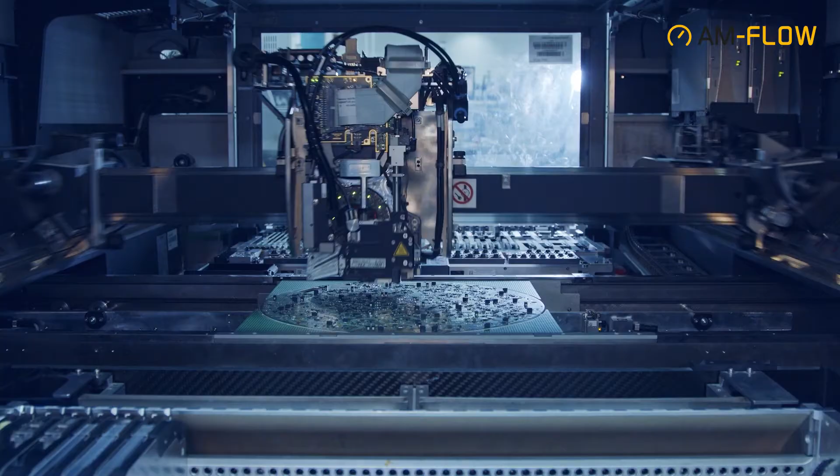AM-Flow is located in the vibrant city centre of Amsterdam and in Eindhoven at the Brainport Industries Campus, known for its unique high-tech ecosystem and a hotspot for Dutch chip technology and robotics. AM-Flow works on automation solutions, Industry 4.0 solutions, for the 3D printing industry, like computer vision solutions and robotization, enabling simple tasks within 3D printing factories. More about this later on.

Let me start with a video of one of our clients and a leading service provider, Materialise. CTO Bart Van der Schueren outlines the need for post-process automation in additive manufacturing to enable companies and AM production facilities in general to scale their business.

As companies scale their AM operations, they increasingly rely on automation. But the potential to scale is limited by the post-processing, which today is still mostly a manual process. Scaling this manual process by simply adding people increases costs, variability, and doesn't increase reliability. If you want to scale production, the only way forward is to automate post-processing. This is especially the case in mass customization, but that's easier said than done.

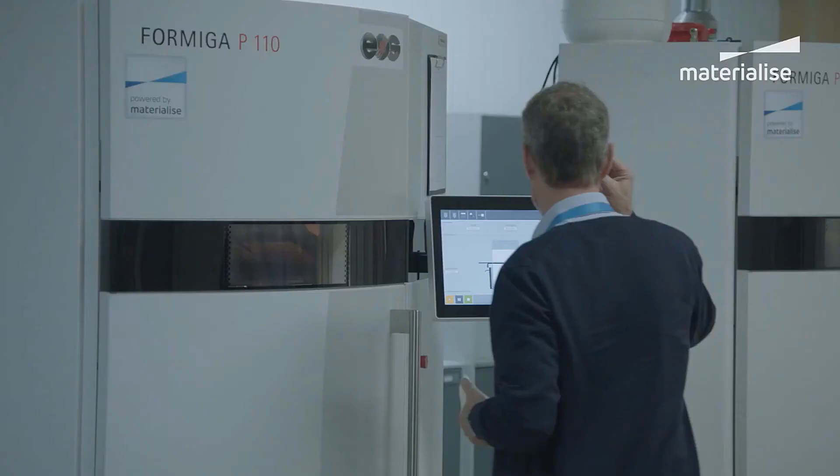If, for example, you're working in eyewear, different customers may want different colors for their personalized eyewear, which complicates the process even more. Also, even if you talk about mass customization, the total output is still relatively small.

We believe that the time for automating post-processing is now, and at Materialise, we've been heavily investing in these processes. An example of our recent commitment to automation is that we robotized our entire cleaning line in our medical production to ensure the highest possible quality standards.

Fortunately, Industry 4.0, with increased automation capabilities in robotics, is creating new ways to automate the post-processing steps. This will require time, effort and new investments, which will only pay off if AM mass manufacturing starts to scale. Which it will. And that's why investing in automated post-processing is vital.

What Bart Van der Schueren highlights is one of the next shifts necessary for additive manufacturing to deliver on some of its most principal promises: a smaller ecological footprint, local production, full freedom of design, and competitive cost price.

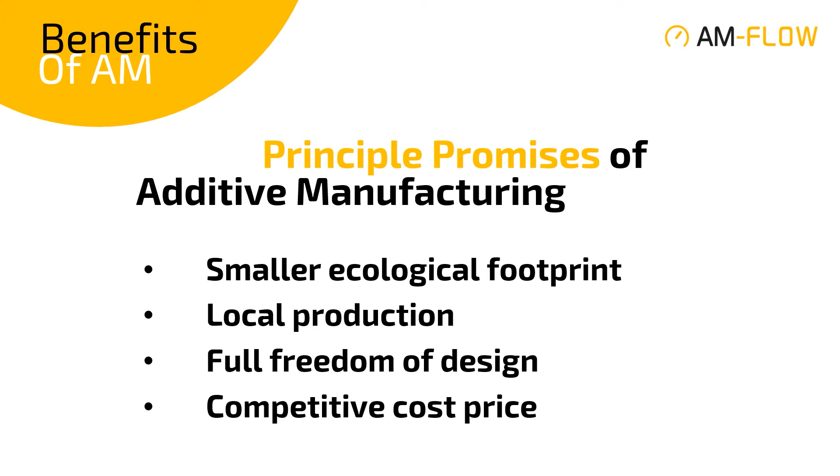So let's put AM-Flow in perspective. As more applications are being found for additive manufacturing, print volumes are growing rapidly, and demand from end users is also starting to increase for more granular improvements in efficiency, productivity, material availability, quality increase and measuring and monitoring, and above all, cost and speed.

And we need to appreciate that the benchmark market is that of traditional manufacturing technologies, which have matured out. They are completely certified and brought to the highest cost efficiencies possible. And we believe this is also the route for the additive manufacturing industry, and we have no time to waste.

Additive manufacturing needs to focus on improving on the fundamental KPIs that not only underlie a broader adoption, but will make additive manufacturing more competitive, reduce costs, increase speed, and improve quality.

Now, it's true that the additive manufacturing industry has grown substantially, and well, the past pandemic year and a half put aside, it looks like it will continue to grow, with ever more applications and increasing numbers being printed.

Industrialization is an often used word in the current context, and to date we still have not been able to give this term true substance in our industry.

To date, our industry has evolved on the basis of workstation optimization. Let me explain: improving the output of printers, creating new materials, adding post-processing treatments for further increase of the quality of the output to meet end-user demands and expectations.

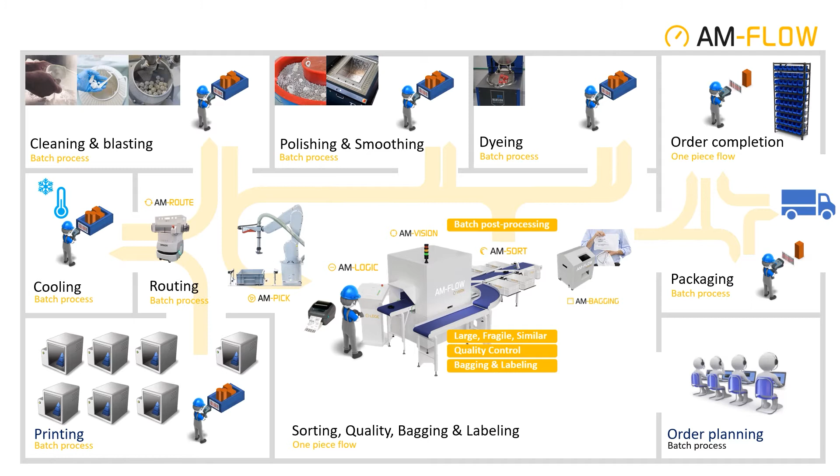AM-Flow is a supplier of this automation. We provide the connecting dots between the individual workstations, creating cost efficiency and lead time reduction. And we aim to create an optimized and automated additive manufacturing production workflow.

We are AM-Flow. So let me ask you, how do you manage to keep track of more than hundreds of parts with endless possible geometries as a consequence of freedom of design? And through all post-production steps required for each individual part without a clear identifier of each part? The answer? Have a look at this video.

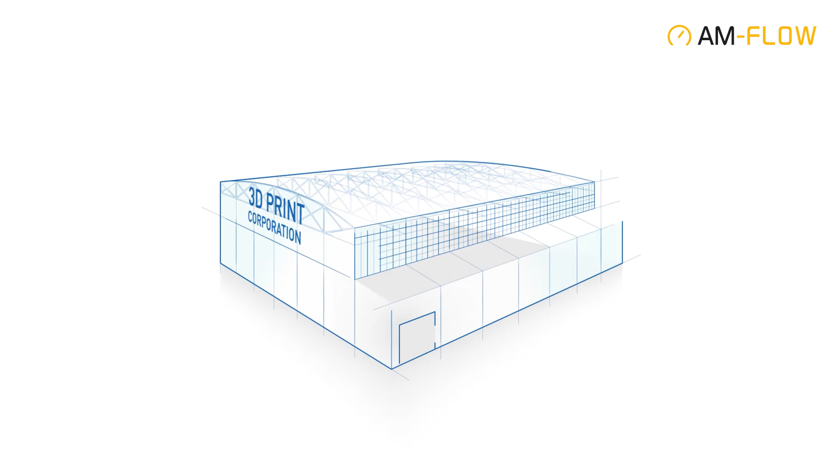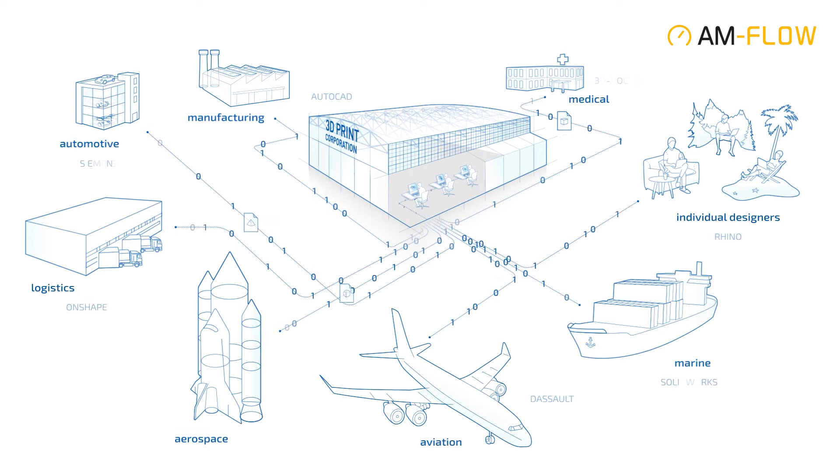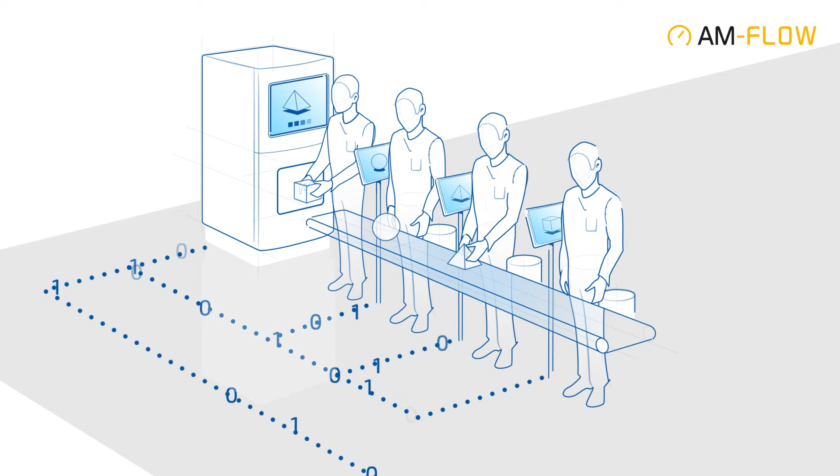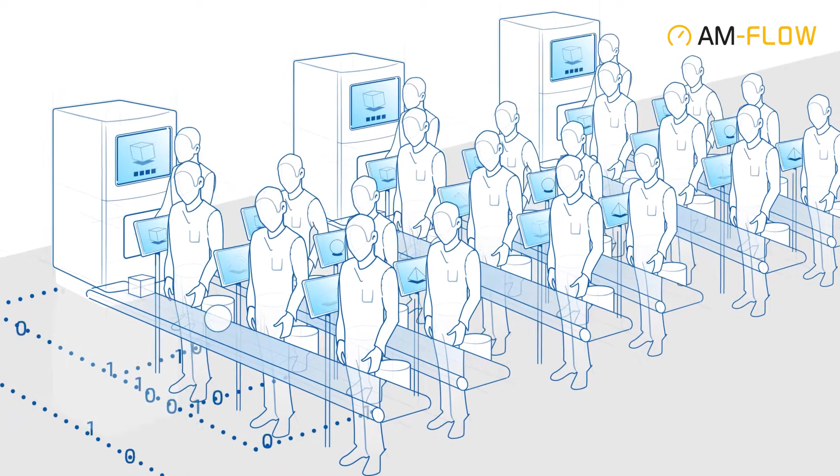Familiar to you? As a successful 3D printing company, you are facing rapid growth in volume as well as differentiation. Handling high mix and high volume goes smoothly in the first stages. The designs of your customers flow as vast amounts of bits and bytes through your pre-production department into your industrial printers. But after 3D printing, the digital flow comes to an abrupt end and switches back to the analog age. Especially all the manual sorting doesn't scale at all. Labor costs increase exponentially, space becomes a big problem, working conditions get poor, and people start making mistakes. The AM Vision is your automated sorter solving these problems.

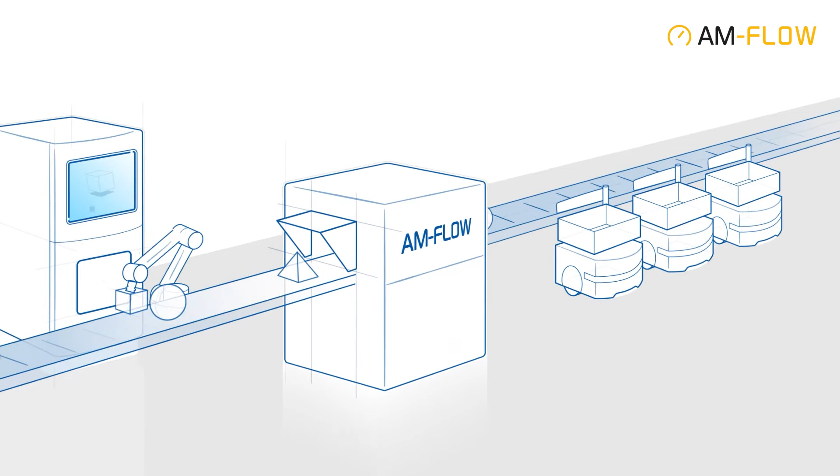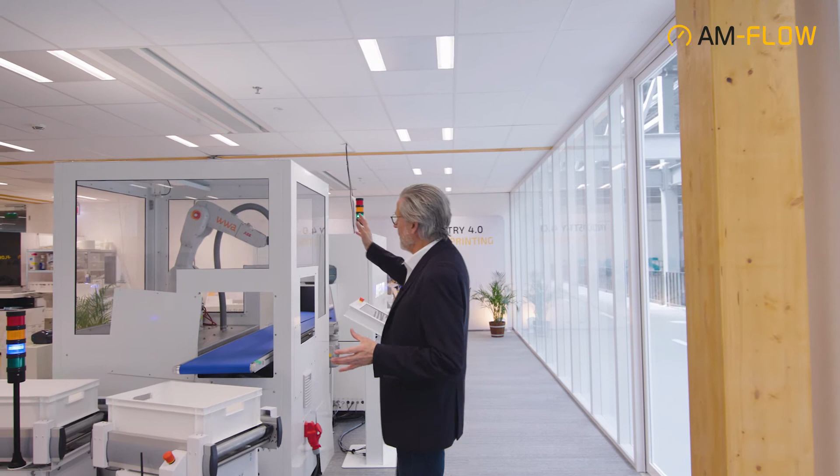First of all, we have here the AM Pick, which is picking up individual parts out of a bin and placing them on the conveyor belt. This is our AM Logic operating console, on which you can identify the parts, and the data is collected and brought back to the ERP. This here is where the magic takes place, the AM Vision, where parts are identified on geometry only. Finally, once these parts have been identified, you can sort them into different bins and route each individual part to the appropriate post-processing step. Now let me talk you through each of these individual solutions one by one.

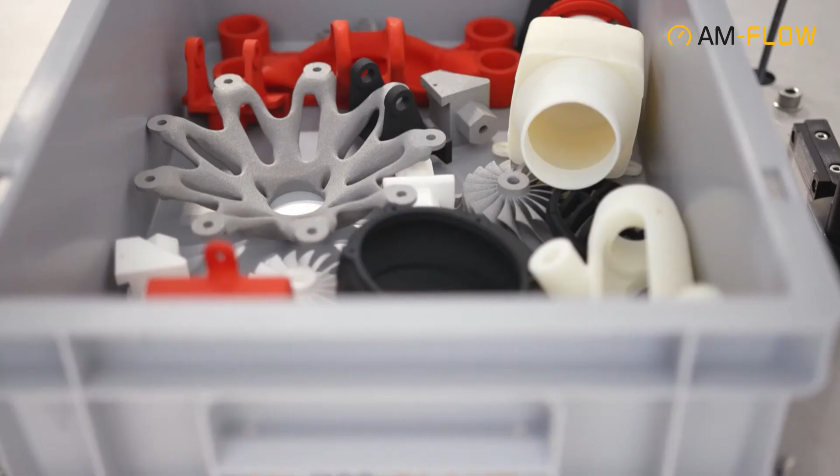So the first challenge we face is automated picking of 3D printed parts. Our AM Pick is a robotic solution able to pick parts of different size and shape out of a bin and place them in a machine or on a conveyor belt, going from a batch process to one-piece flow.

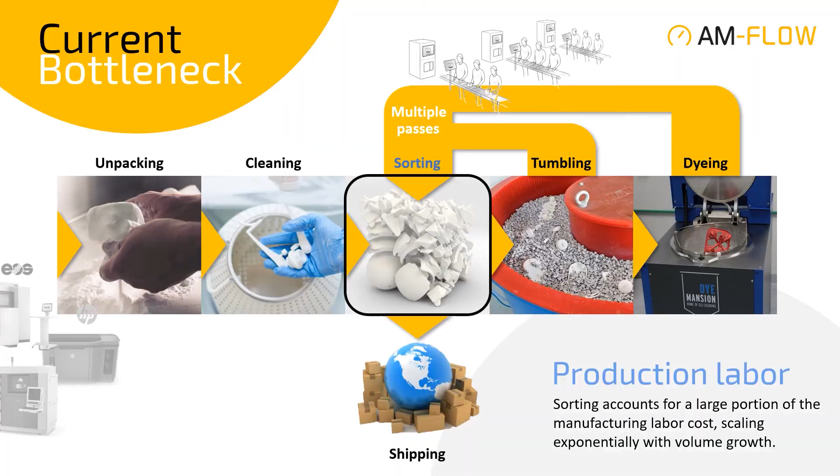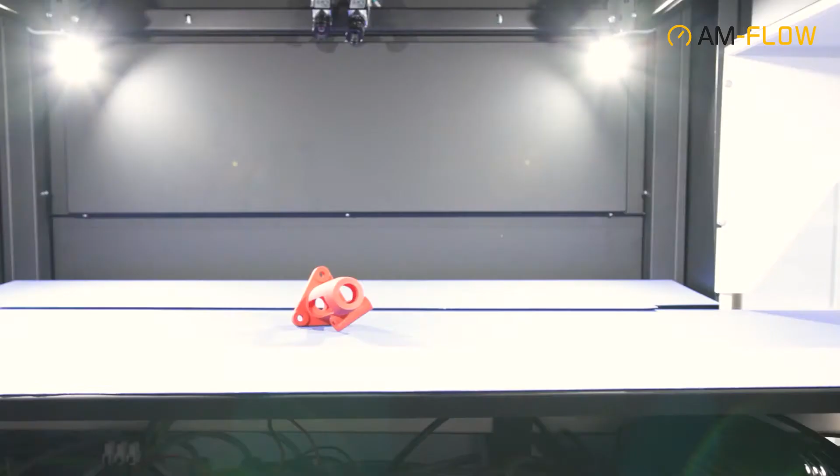The kernel of AM-Flow is the AM Vision. With high mix and high volume output, working ideally to one-piece flow, identifying unique parts manually has become a time-consuming and labour-intensive task. So once cleaned, bins with 3D printed parts of all different shapes, each with individual post-processing steps like polishing and dyeing, must be sorted and go to different departments or be collected for different customers. You can now automate this with the AM Vision. The AM Vision identifies parts based on their geometry only. This geometry is a unique fingerprint, and we can recognize parts in under a second, in 0.2 seconds. With this identification information, we're able to route these parts to the next step of the process for this printed part.

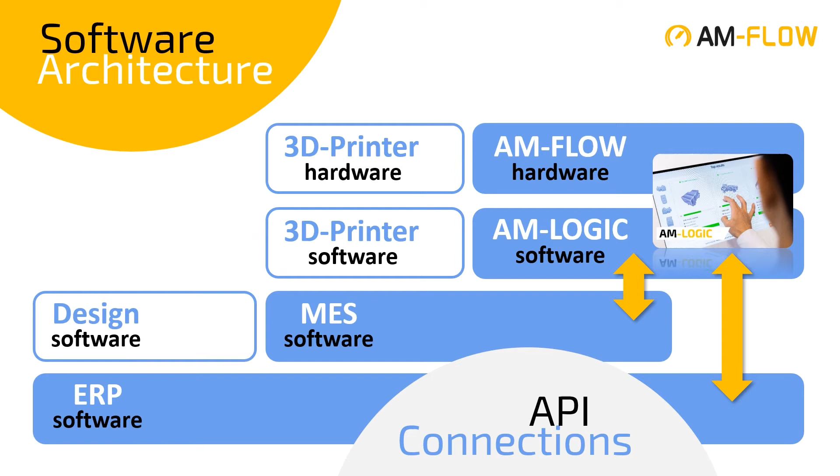The AM Logic is our software solution. It provides a seamless integrated software connection between our modules and the existing IT architecture of the customer. The AM Logic software suite contains APIs for both traditional and 3D printing, CAD/CAM, ERP, MES and PLM systems. Static or mobile operator consoles are provided so that everywhere in your factory you have the digital backbone at your fingertips. Connecting the dots in end-to-end digital manufacturing—that's what this is about.

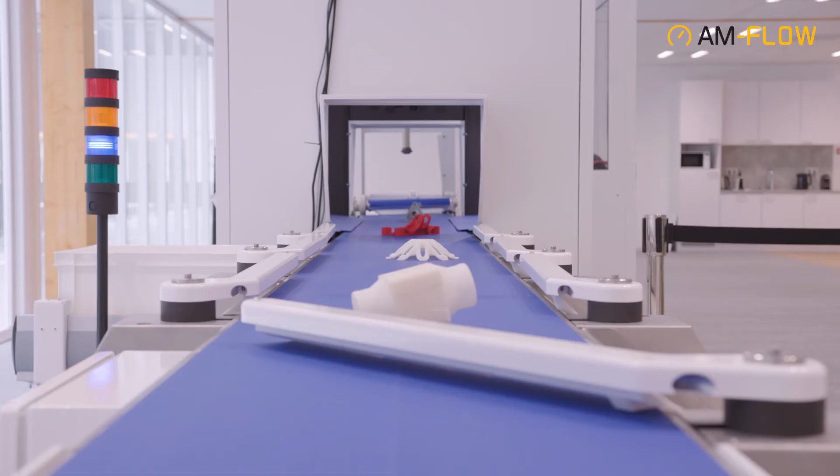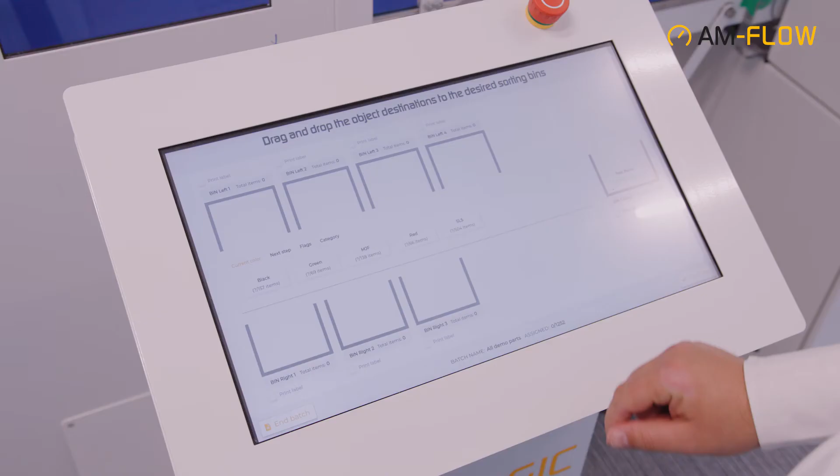In combination with the AM Vision, AM Sort forms a complete 3D printing sorting station. The design is modular, easily expandable and pre-wired. Items are shifted to either side of the sorter conveyor, and depending on the amount of finishing steps you have in your factory, you define the amount of sorting docks you require. Selection of the bin is easy via the console. Each end of the AM Sort can be adjusted to attach other modules, like automated guided vehicles or bin selectors, or our bagging and labeling solution.

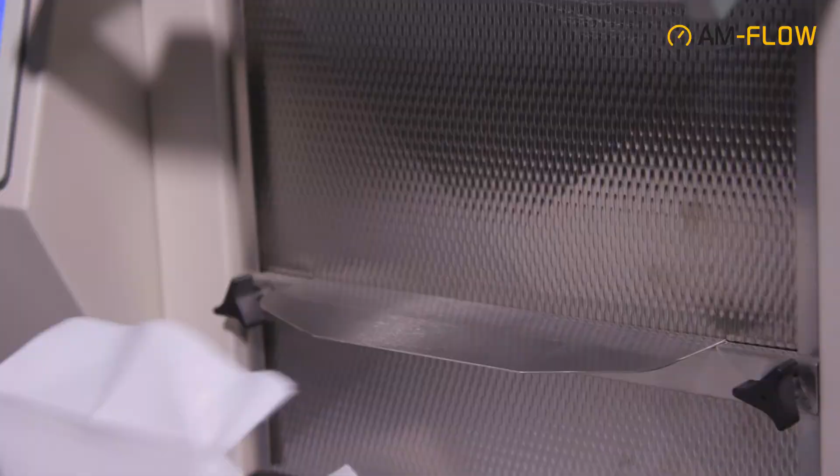From a customer satisfaction perspective, this is what it's all about: the part ready for shipment to your internal or external end customer. The AM Bagging is a bag and label unit that can efficiently print high-resolution text, graphics and barcodes directly onto bags and present them ready for shipping. Pairing the AM Bagging with the system-matched AM Sort ensures quick and efficient handling of 3D printed parts. Operating at speeds of up to 25 bags per minute, the system offers innovative engineering with a next-bag-out printing feature to ensure greater accuracy and eliminate product queuing in order fulfillment.

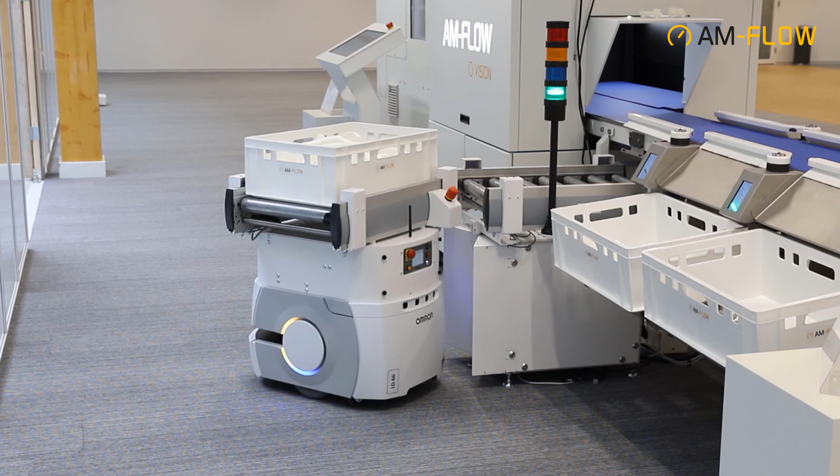Finally, AM Route. AM Route transports your customer's final product to the DC, or before that, to the next production batch process step. Fully autonomous, intelligent vehicles increase throughput and reduce transportation costs and machine idle time, while allowing employees to focus on tasks that require complex human skills. Part traceability at the highest standards, thus eliminating errors.

Let me take you through some final thoughts on how we believe we can overcome the challenges companies are facing in scaling their AM production. We believe the pain in the market is an absence of post-processing workflow automation. But to be able to automate the post-processing workflow, post-processing automation needs to overcome a technical issue: how do you identify parts given the infinity of geometries that can be produced in additive manufacturing? AM-Flow has solved this challenge of identification of 3D printed parts by geometry only.

And the benefits are substantial on three levels. Economics: the scalability of the business, increased revenues potentially, cost price reduction, and maximum capitalization of assets. From a digital process perspective: increased workflow efficiency, tracking and tracing leading to a certifiable production process, automatic data entry, automatic counting, Industry 4.0 digital thread. And from a customer satisfaction perspective: lead time minimization, minimizing delivery mistakes, same-day delivery, audited processes, custom bagging and labeling.